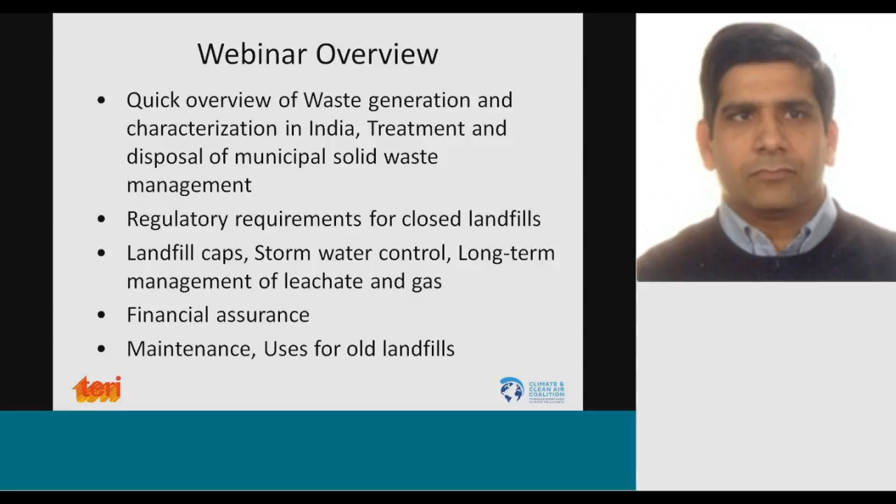So, just a quick overview in terms of the waste generation and characterization in India. If you look at the per capita waste generation per person per day, at an average throughout India, we'd say around 0.6 to 0.7 kg per person per day. This data is slightly older, published in 2015, but the data came out a few years before that. And here, as you can see, for the most part we are looking at around 0.5 being the average.

The CPHEEO manual, if you have looked at that manual, requires you to take around 0.6 kg per person per day for some design calculations. So even if you go by the CPHEEO manual, 0.6 is an average value for India, especially for urban India. But right now, Delhi is in the news for its air pollution problem. We may touch on that later today.

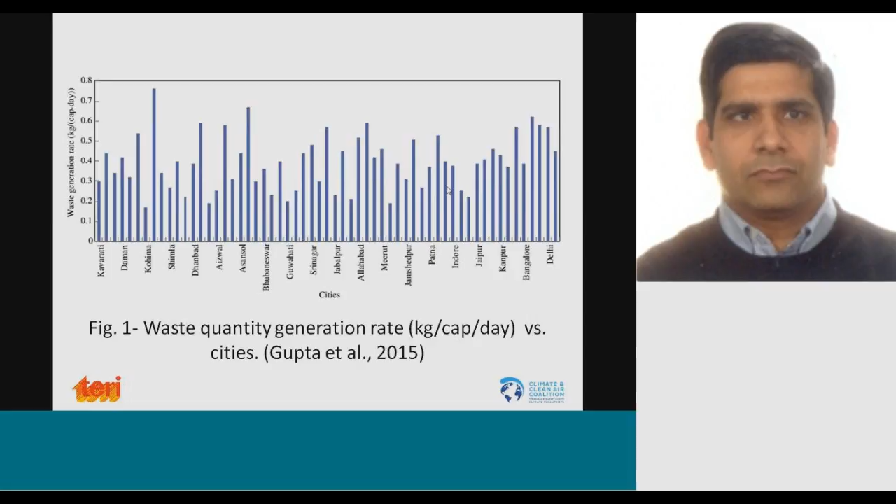But if you think about just Delhi city, if you are in a wealthy area of the city, you may find waste generation to be much higher. So if you're in South Extension, Defence Colony, Greater Kailash, or Vasant Vihar, you may find the per person rate to be higher compared to other areas of Delhi which are not that well off, where you see mostly lower middle class or middle class families. So there will be variability, but in general we can take around 0.6 to 0.7 kg per person per day. That's the typical total waste that is being produced.

And for different cities, this was a study presented in tables by the municipal manual. Depending on the population of the cities or towns we are looking at, the waste composition keeps changing to some extent. For the most part, the important stuff is the compostable material, which can be composted or anaerobically digested. That has a variability of around 30% to 56%.

As you go into the bigger cities, with a population of more than 5 million, you see that the compostable matter actually goes down, because more and more packaging material starts showing up, all those plastics which are not really compostable. And as we go to smaller towns and semi-urban areas, we start seeing more compostable material. And of course there are some variabilities in between.

And the inert material, for the most part, is finding its place in the dump site today in India, and in the landfill in many parts of the world. That's also substantial: nearly 40 to 50% of the waste is inert material. So that's it in terms of composition.

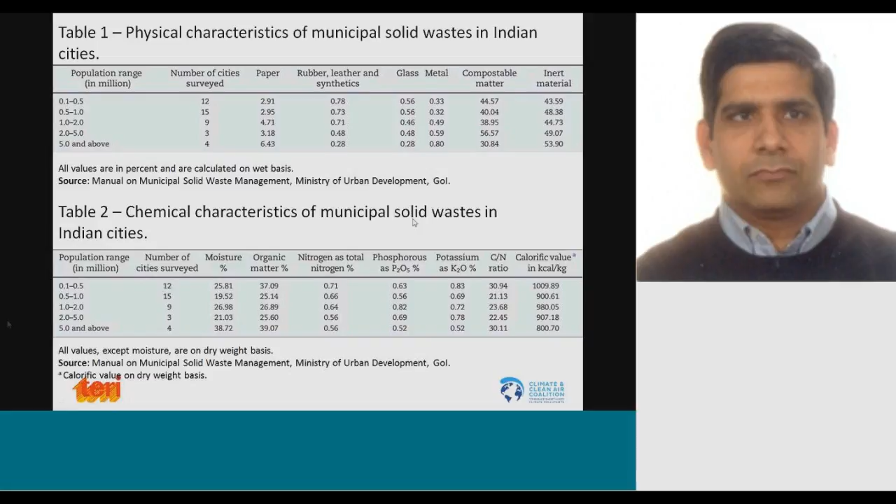We can achieve that if we do source segregation. Unfortunately, we don't do that. We have to do it as per the new MSW management rules, but we are not able to. So that's why we are where we are, in terms of just a snapshot.

And this is the same thing presented in a pictorial way, where you can see that fruits, vegetables and food waste are predominantly the compostable organic matter. When we talk about recyclables, the paper, plastic, glass, and metals, most of this material is taken away by the commodity owners. So the good quality ones don't really show up in the dump site. Only the ones which cannot be recycled show up there, and some soiled material mixed with other material may show up. There are also some toxic substances present.

This particular pie chart is not to scale. Don't think that 25% is toxic substances. This is just to show you the different types of things present in municipal solid waste. Then you may have some soiled waste like blood stained cotton, sanitary napkins, disposable syringes. So those things are also part of household hazardous waste.

If you have looked into the MSW Management Rules 2016, we should do a three-way collection: one for dry waste, one for wet waste, and a third for household hazardous waste. Some of the material from the toxic substances as well as from here should make its way to household hazardous. Some of these could also be classified as biomedical, but we don't have house-to-house biomedical waste collection, so we can put it in household hazardous waste.

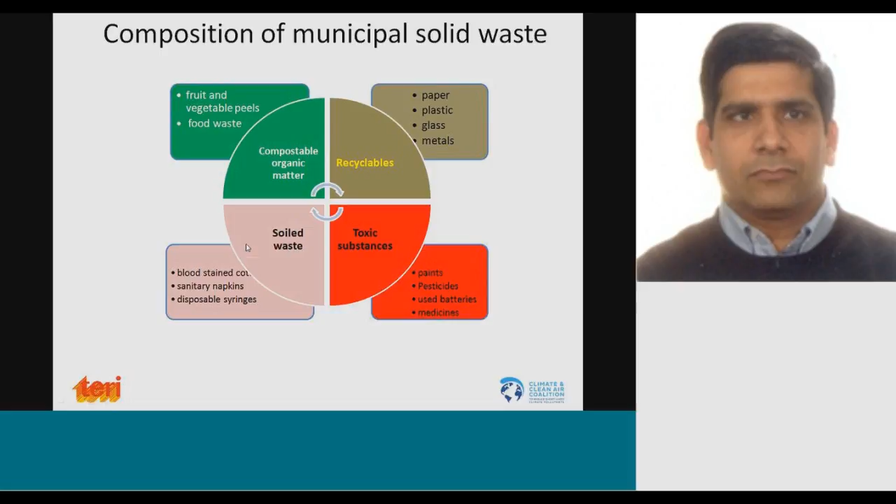Percentage-wise, the organic fraction is still pretty high; 40 to 60% is the organic fraction of municipal solid waste. And paper, which again is organic, but is hard to degrade due to high lignin content, is around 3 to 6%. Inert material is 30 to 40%, plus some plastic and metals.

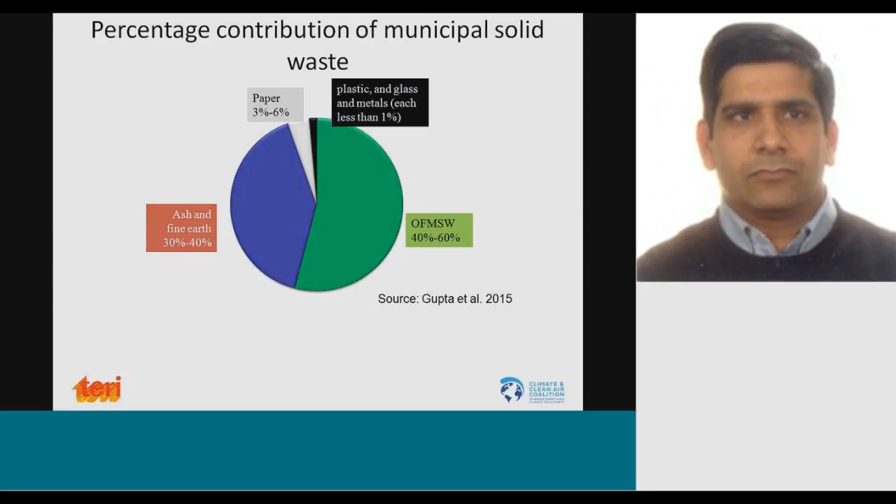It looks like this is the sample after the kabadiwallas. It's not the waste produced at the house, but the waste being disposed and coming out of the house, because recyclable plastic, paper and glass is taken away at the house level itself.

In terms of collection, treatment, and disposal, there are a variety of sources the waste comes from. It goes from household to primary collection, secondary collection, a transfer station, and then to dumping sites for the most part in the Indian context. Some composting is being done. In terms of recycling, we have households and buyers, then rag pickers from primary collection. There are recycling dealers and rag picking happening at the transfer station.

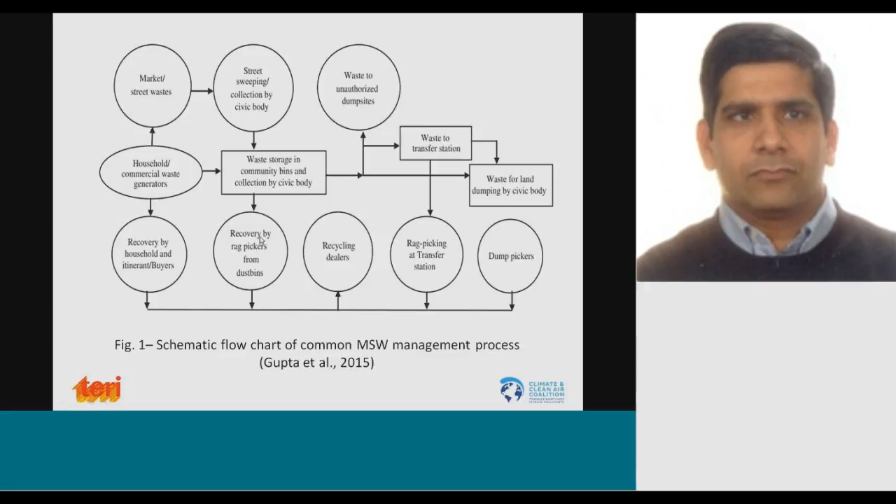Even at the dump sites, if you go to Bhalswa or Ghazipur landfills in Delhi or any big city landfill, you find several people trying to take out recyclable materials and make a living out of that. So people are doing dump site picking as well. They do help with recycling, but the environmental health and safety, as well as the processes they use, may not be so good.

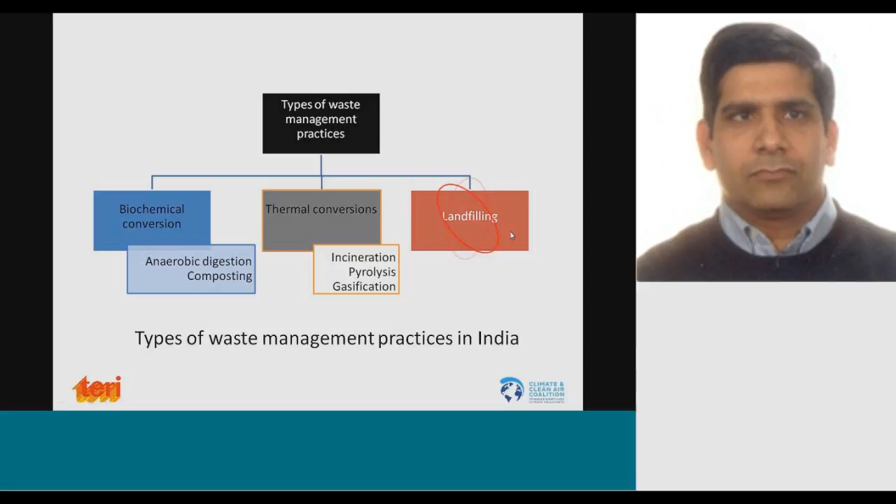Looking at management practice, there is some biochemical conversion, some anaerobic digestion happening, but very little. Composting is happening more in the country. We are trying to build some incineration plants, and a few are already running, but nearly 90% of the waste even today is going to landfill, which is mostly a dump site. So we'll start focusing.

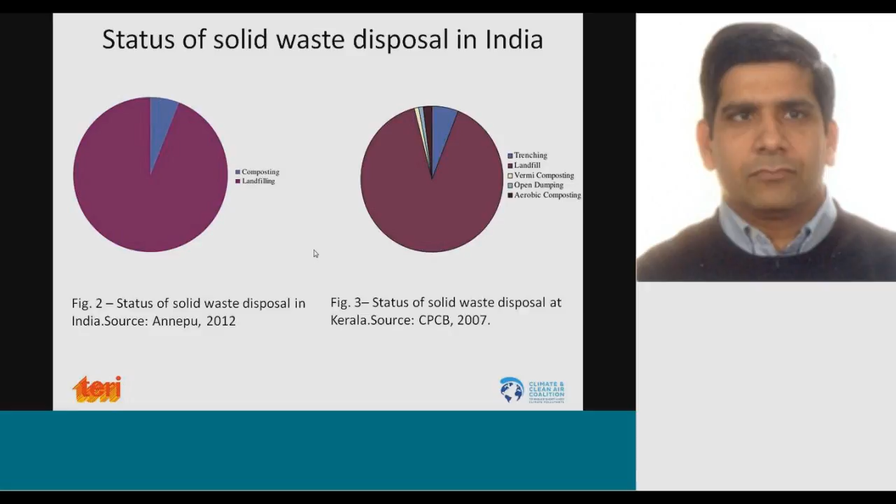So why is landfill still being used that much? It's the least cost option. It doesn't require skilled manpower, and in some places you can use it to convert marshy land into a useful area, but there is a danger of contaminating the groundwater and the subsurface. Natural resources return back to the soil and could be recycled; that's the argument people make, but I don't know how true that is.

Gas produced can be used as an energy source, for power generation, but there are a lot of problems with landfills as well, such as surface runoff during rainfall that causes pollution. Even when the landfill is active, we do have the problem of surface runoff.

And the same thing when the landfill is closed, we have to make sure that the surface runoff doesn't get inside the landfill, because that will actually be converting all that runoff to leachate. Then soil and groundwater may get polluted by the leachate as well.

Because the landfill is a huge area, even a very good landfill site has a gas collection efficiency of around 55 to 60%. If you find some landfill with around 60 to 65% gas collection efficiency, that's considered a very good gas collection system. So think about 65%, even at the best.

So another 35% of those are fugitive emissions. They just get into the atmosphere and cause greenhouse gases and climate change and all that. So that's why we need to have a good gas collection system as part of the landfill closure, and to monitor that gas collection system as well.

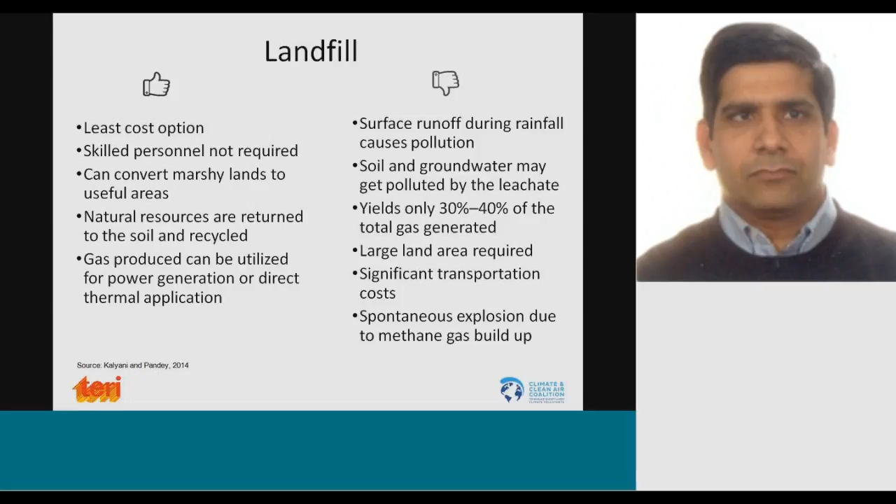Sometimes in these dump sites, we also put things on torch - we just put the fire on purpose. When I say we, I mean the people working there, the municipal workers who want to put more garbage on top. It's because the landfill is filling up and they need to make some space. In the middle of the night, somebody puts a torch there and it burns and then makes some space, which is not allowed, but it does happen.

So since the landfill is the focus of this webinar, let's look at landfill closure and what a landfill is. I assume some of you may have some idea, but I thought I'd give you a quick layout of what a landfill is all about.

So that is also there - we have leachate produced as a part of the waste degradation. That's a byproduct, so that is also used on there.

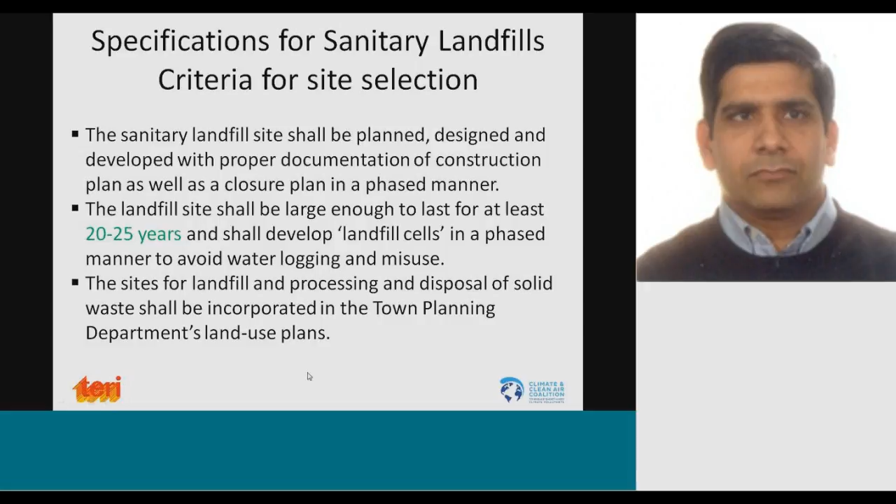As part of the design and the plan, you need to have a detailed design, proper documentation, and a closure plan, which we'll talk about. And it's part of the town planning.

So in site selection, there has to be some buffer zone with no development there. There has to be some temporary storage facilities. All these things are there in the solid waste management rules, and also in the municipal solid waste manual.

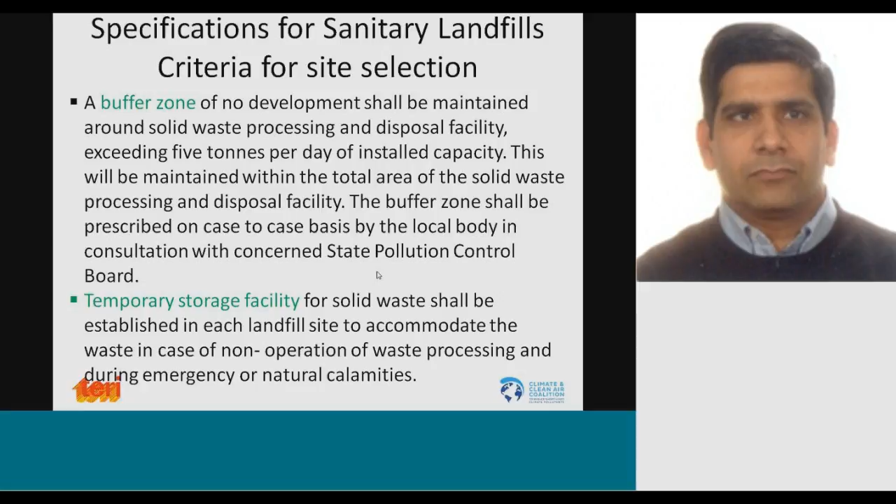You can download that if you go on the Swachh Bharat Mission urban website, or just search for the CPHEEO manual for municipal solid waste management in India. You'll find that manual PDF and can download it. It's several hundred pages, but it's a nice document, a good summary. There are some other things also available there.

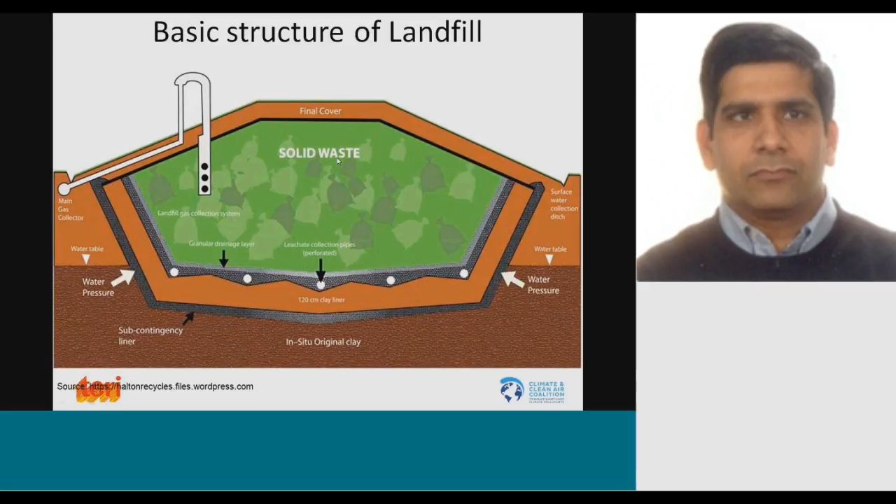The landfill should be 100 meters away from a river, 200 meters away from a pond, and all that. So this is what the landfill is all about. Let's focus on the final cover, which is the focus here.

Modern landfills are complex engineering systems. They are not like dump sites where you have a hole, you start putting garbage in, and then put some dirt on top. That's not how modern landfills are managed.

Modern landfills need to have a leachate collection system. Also, you see the groundwater at the bottom, and groundwater monitoring wells have to be there. Gas monitoring probes have to be there. A rainwater retention pond has to be there, so whatever rainwater flows through the slope can go into that area. So here again, groundwater monitoring.

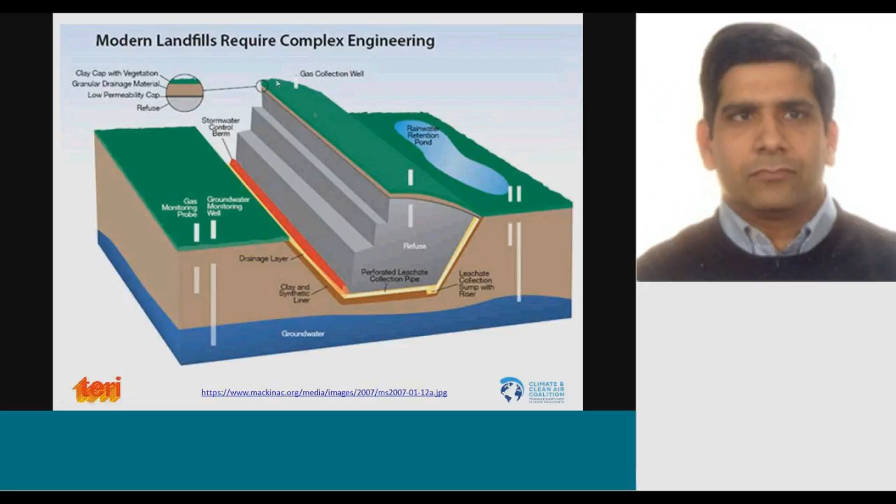There has to be a leachate collection system, there has to be a gas collection system, which you see over there, and the stormwater control berm is there. And then you have a very good cover design for this landfill.

In terms of landfill closure, when the landfill stops accepting waste, it needs to be closed. And when we say it needs to be closed, there is a certain regulation for that, and the regulation requires us to put an engineered cap on it. The goal of the engineered cap is to keep the rainwater out and the gas in.

Right now our focus is on why this landfill became important as part of the waste management system. Since, I'd say, the late 70s, early 80s, environmental professionals in the Western world were wrestling with how to manage this garbage so as to minimize the environmental and human health impact.

Since the technology was not as advanced as it is today, there weren't many things that could be recycled. For example, food waste to energy was not even envisioned during that time. So people thought that if we come up with this landfill, which will have a liner at the bottom and a cap on top, it will produce leachate.

So I will collect the leachate. I don't want to have the leachate build up, because that will create a problem in terms of the hydraulic stability of the landfill. There will be pressure, pressure build-up that will lead to a landslide.

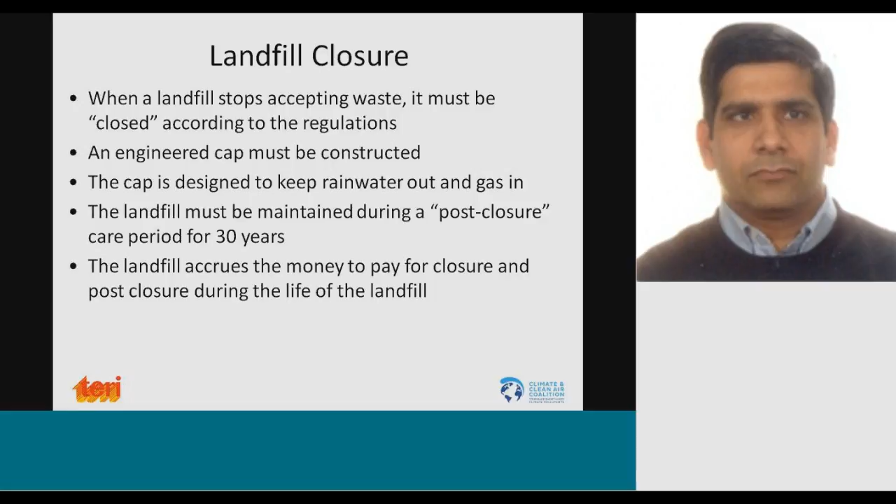So as per Solid Waste Management Rule 2016, there is a requirement for closures outlined. You need to have a final cover design, a closure plan, and a post-closure plan. And we'll talk a little bit about that.

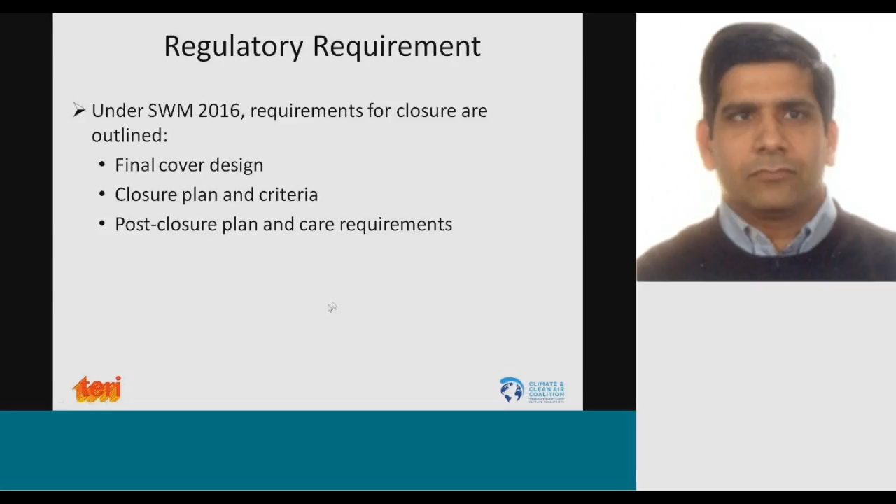It says that once the landfill reaches full capacity and you're not accepting additional waste, it should be closed, and you can reduce the waste by biomining.

If you don't see any further gas being produced, no more settlement - you have to measure settlement every 6 months or every year, and then look at the leachate quality and gas quality. If you don't see any of those, you get convinced that the waste has already degraded. So you can go for biomining, processing of the waste, and find the place for placement of the residue in the new landfill, or you can do the capping.

Capping is basically putting an enhanced geomembrane, and if needed, you can collect and flare the gas as an additional measure. You can put some extraction wells for pumping and other stuff. There could be other suitable methods as well.

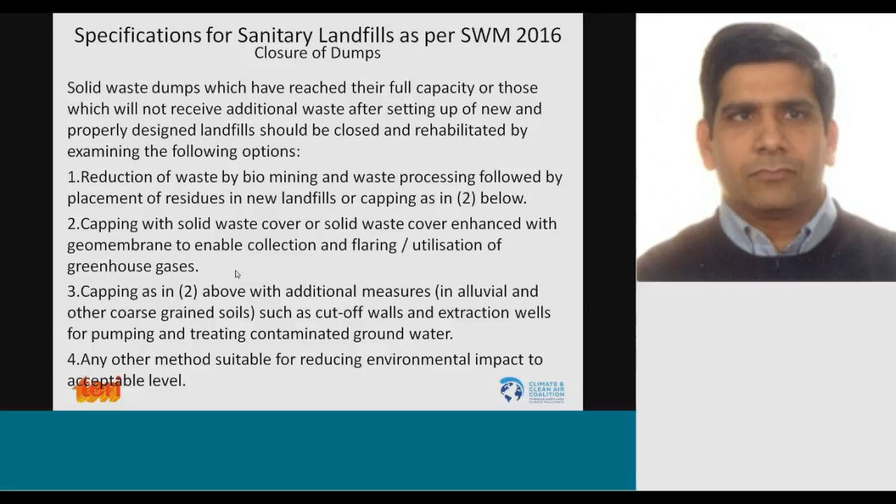In summary, for landfill closure, the goal is to minimize maintenance. We want to make the closure in such a way that maintenance is easy, control erosion so the waste or cover soil doesn't get eroded, and control and manage leachate, landfill gas, and settlement. We don't want one area of the landfill to settle unevenly.

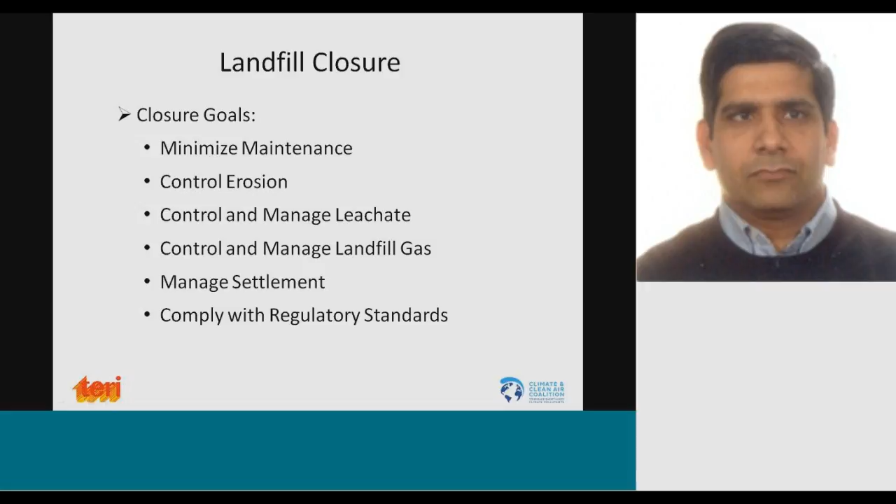That's what we do during landfill operation as well. We try to spread different types of garbage in different parts of the landfill so we don't get huge settlement in one area and not much in another, because that leads to liner stability problems. And then we have to monitor the regulatory standard.

So this is a typical landfill cap, this is how it looks. You have solid waste at the bottom, then the gas collection pipe, with a gas venting layer in between. Then you put a low permeability soil because you don't want the gas to escape through it; you want the gas to pass through these pipes.

Then you put a barrier layer, just to keep things safe from activities on top of the landfill, because with vegetative layers and other activities on top, you have lots of vehicles coming over it. So the barrier layer protects all the systems below. Then the gas collector can go to a gas recovery system and so on.

So you have a barrier soil layer around 60 centimeters, a drainage layer of 15 centimeters, and on top of that a vegetative layer. You put some trees on top of the landfill, which keeps the soil intact and also helps keep erosion low.

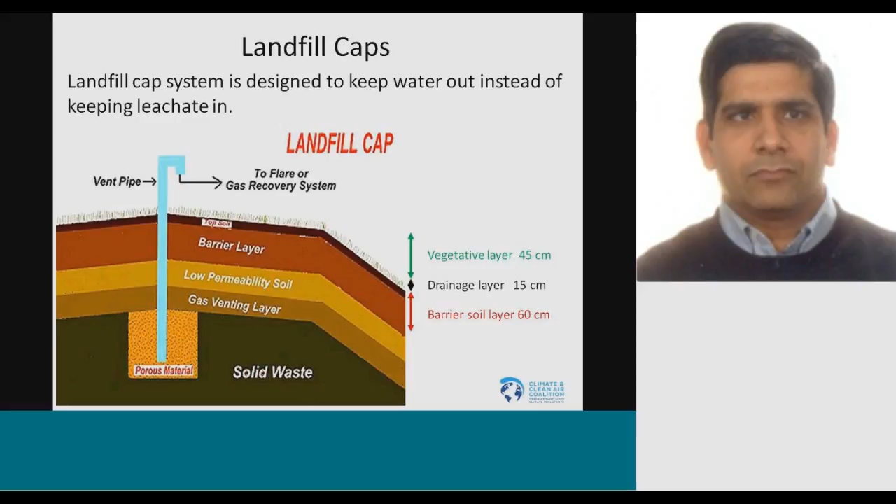That's how a typical landfill looks. From a distance, it just looks like anything else - you may even confuse it with a golf course because of the slopes. If it's done properly, you should not smell much on top of the landfill. If you're smelling gas, that means there's some problem with the gas recovery system.

Another picture of the same thing: you have the waste and gas venting, low permeable soil, then a geomembrane and the drainage layer, then a biotic barrier layer where you put wood chips and other stuff, and a filter, so even if some gas does escape it gets treated before it reaches the top layer. On top you have the vegetation and soil top layer, with vegetation planted on it.

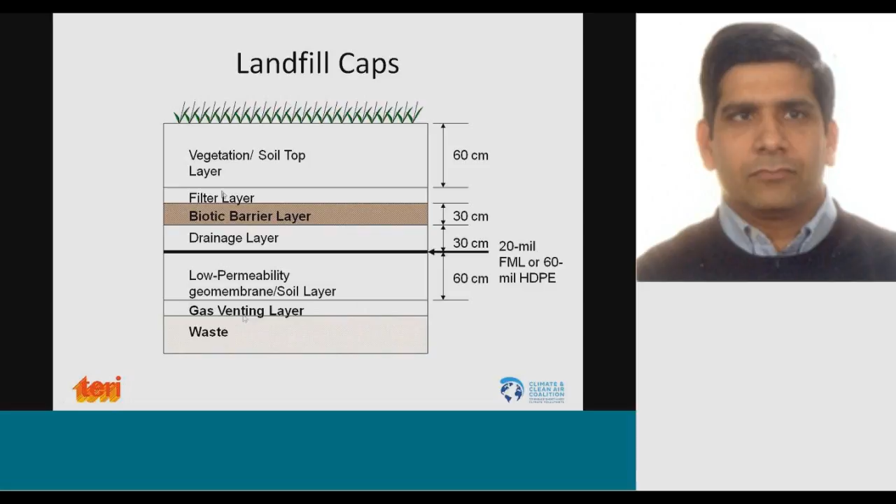So this is how the landfill caps look like. When I say cap, it's on top of the landfill and also on the side slopes. So this will be on the top as well as on the side slopes - that's how the caps look.

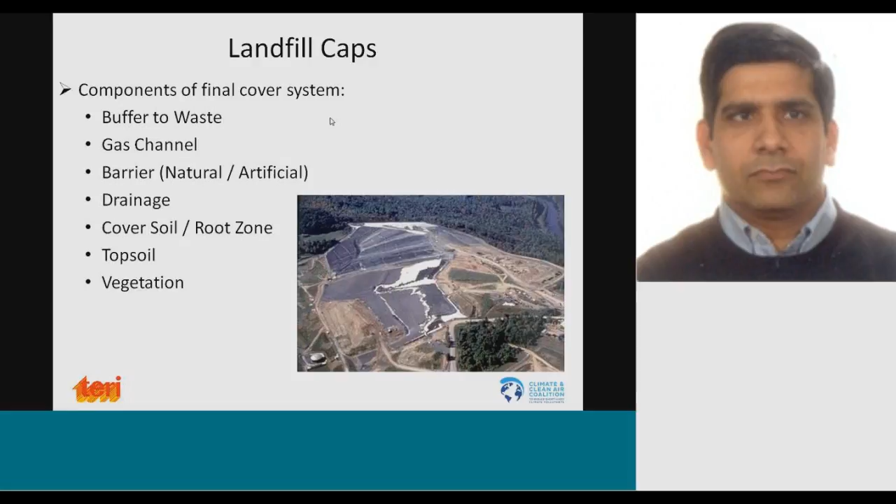In the final cover system, we put a buffer over the waste, as you saw, with several layers on top. We make sure the gas is collected properly, and there is a barrier - natural and artificial - along with drainage, cover soil, topsoil, and vegetation, all part of that system.

Once you have this cap system, there are other supporting systems. We have to make sure that after a rain event, stormwater does not create huge ponding on top of the landfill, because that would be a problem. So there has to be proper stormwater control with proper slope. Stormwater occurring on the landfill property or from adjacent areas should be prevented from getting into the waste, because it shouldn't, since we have the top liner with the HDPE geomembrane, so it should not get in.

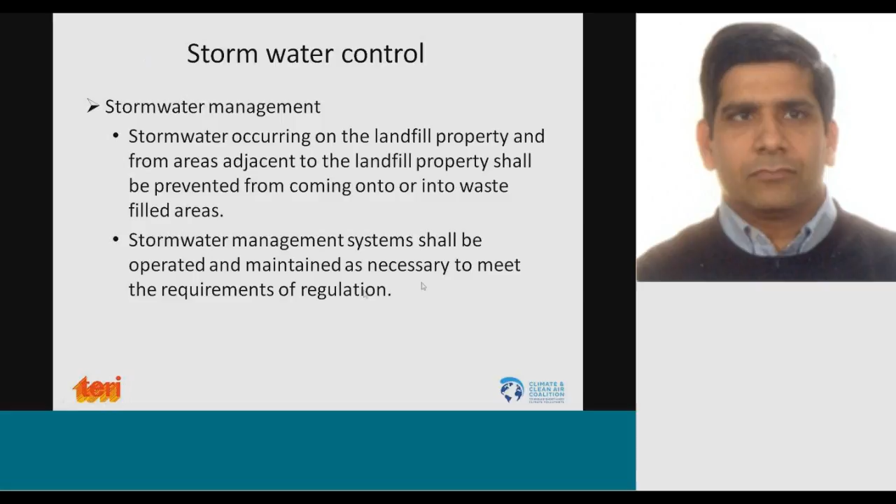Just in case you did not have this: you have the top liner and the side liner, and they need to meet at the anchor trench. Sometimes this meeting point does not happen nicely because the two are constructed at different periods of time. So there may be areas where stormwater can get into the landfill, and we have to prevent that. We should not let them get into the landfill, because that creates problems for landfill stability and for the leachate collection system, since a lot of leachate will be produced. We've seen this happening in some landfills. So the stormwater system shall be operated to meet this requirement.

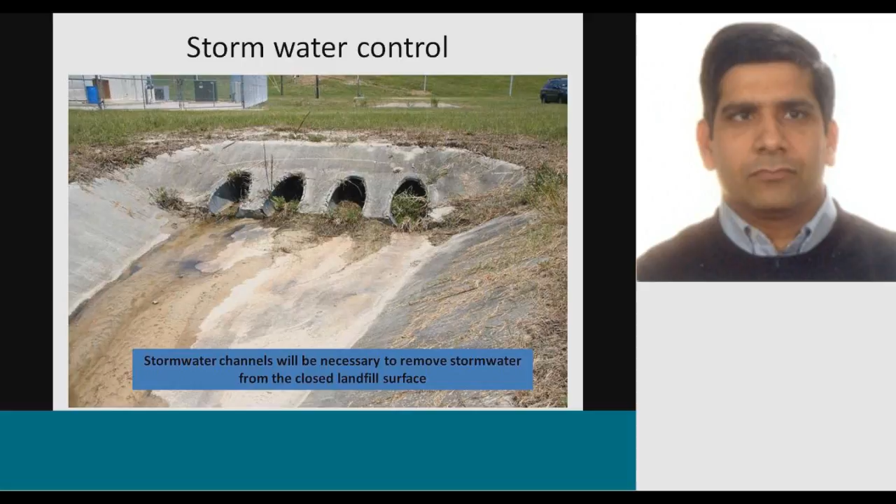For example, here is the stormwater control. We have stormwater channels, and we have to provide a nice slope and a nice drain. That's what it's all about. In a simple way, you have to have a nice slope, so any water coming on top of the landfill or on the side slopes should be taken away from the landfill as quickly as possible and put into these stormwater channels, so it doesn't pond on top of the landfill. The system is designed to route the stormwater away from the cover system, so it flows nicely away with a nice slope.

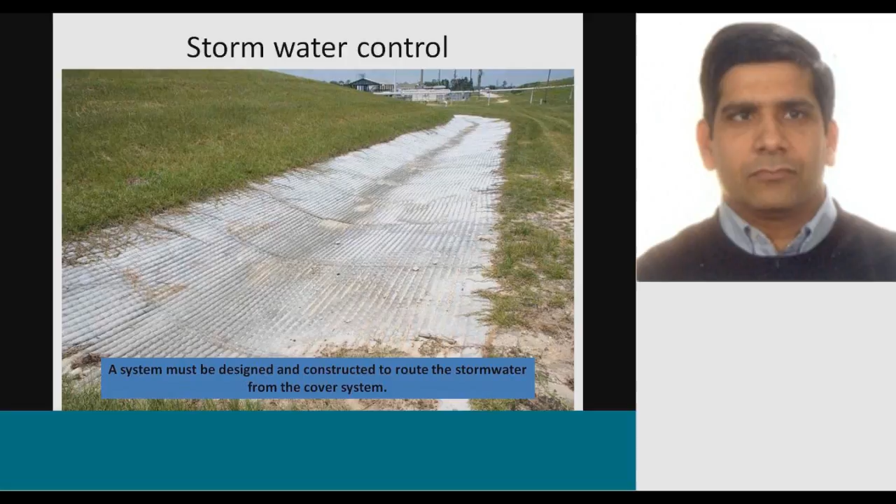This needs to be maintained. We cannot let all the grass grow up, or let a lot of dirt come in and mess up the slope. That maintenance has to be done over the period of post-closure care. Again, that's why money is important - it's a long-term management with routine maintenance for as long as 30 years, sometimes even longer, especially for municipal solid waste which still has organic matter. If you have just inert material, some landfills may be allowed to close before 20 or 30 years. But it depends on the leachate quality and gas quality - only then can you make the final decision.

So you have to maintain the final cover. If you collect leachate, you have to treat it as well - you cannot just dump it anywhere. Leachate needs to be treated. Groundwater needs to be monitored, especially at the landfill site. On both the upstream and downstream sides, you need to install groundwater monitoring wells to make sure the liner is not leaking and things are not getting into the groundwater. Those things have to be looked into.

Then there's gas migration - is the gas making its way into the groundwater? That's also problematic. If the gas goes into the subsurface, we have methane and CO2, which means an additional carbon load. This additional carbon load has the potential to alter the biogeochemistry of the subsurface. When it alters the biogeochemistry, that leads to pollution not only from the landfill itself, but also because of, say, arsenic present in the subsurface soil - and as we know, iron is a very good adsorption site for arsenic.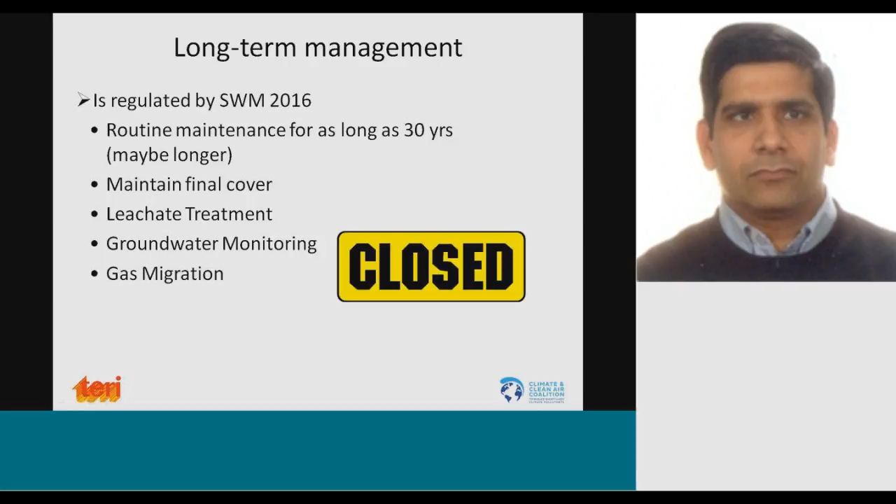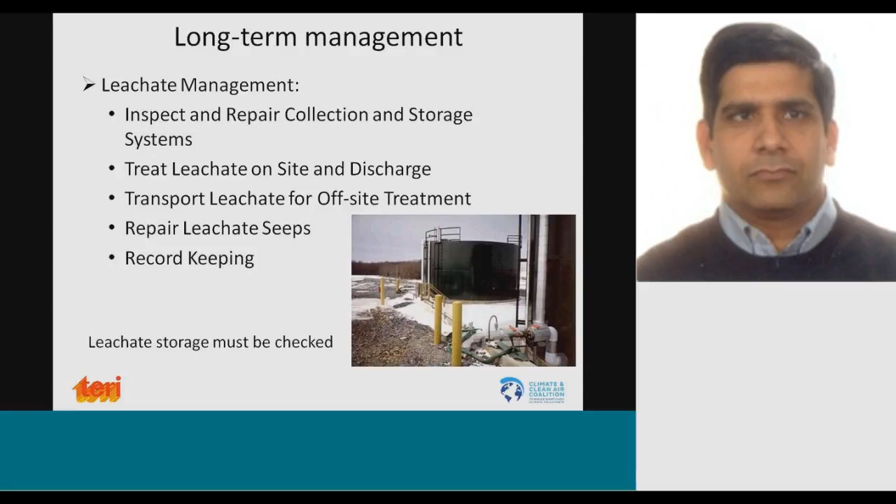The leachate has to be collected. The leachate collection system needs to be maintained properly. There is always a chance of the leachate collection system getting clogged, especially because of sulfur-based compounds. So that needs to be looked at very carefully. Leachate needs to be transported. It has to be treated. So these days we have robots which can go into the leachate collection system pipes and help us do the cleanup. If you go on YouTube, you may find some of those robot videos.

Then gas has to be collected and maintained on site. Inspect the collection system. Condensate removed. Since the landfill is slightly warmer than the ambient, when the gas comes out, it cools down, so we have some moisture that needs to be removed. Then if it's being flared, the flare has to be maintained, the recovery system, record keeping has to be done.

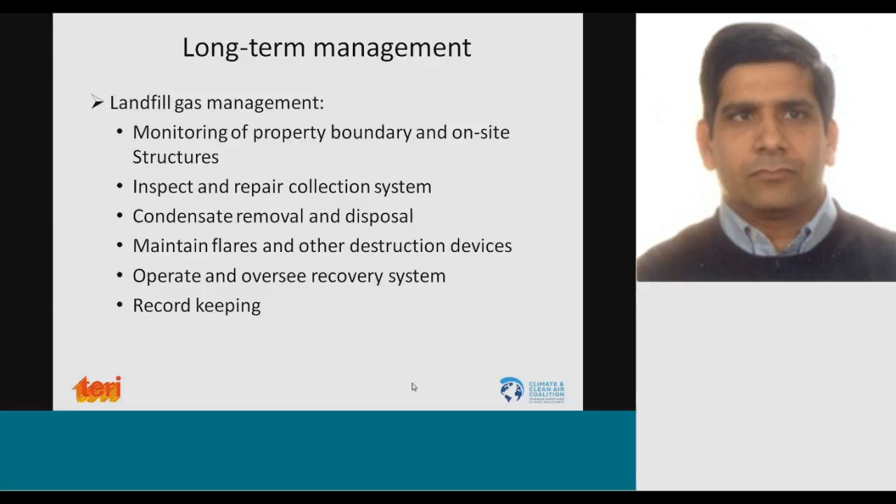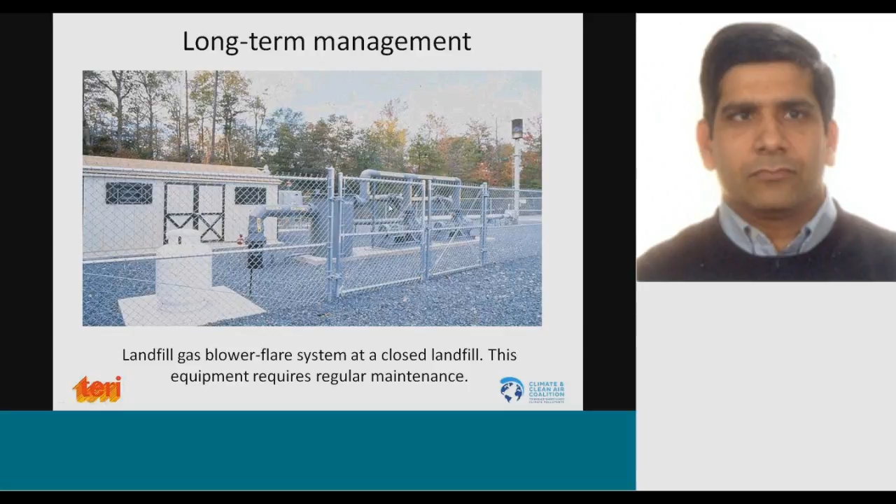The landfill gas blower flare system requires regular maintenance, especially if you have sulfur-based and other gases. That is nasty for these equipments, so you have to have good upkeep. That's your flare station right there, and this is the blower; all the vacuum and other things are controlled from here. And of course it has to be in a locked environment so that it doesn't get into some bad people's hands. So all that requires money.

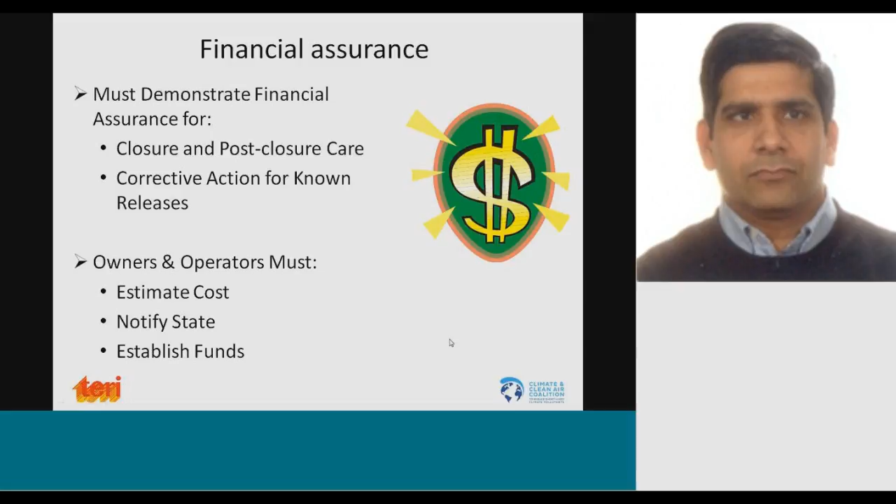So we need to estimate the cost to find out the money that would be required. We have to establish the fund for that. It could be in the form of a trust fund, letter of credit, bond, insurance, financial tests, guarantees, or a combination of mechanisms. So somehow we need to have money to do this for 30 some years. You do the cost estimate. You also do adjustment because there will always be inflation, because you're looking at a 25, 30 year time period.

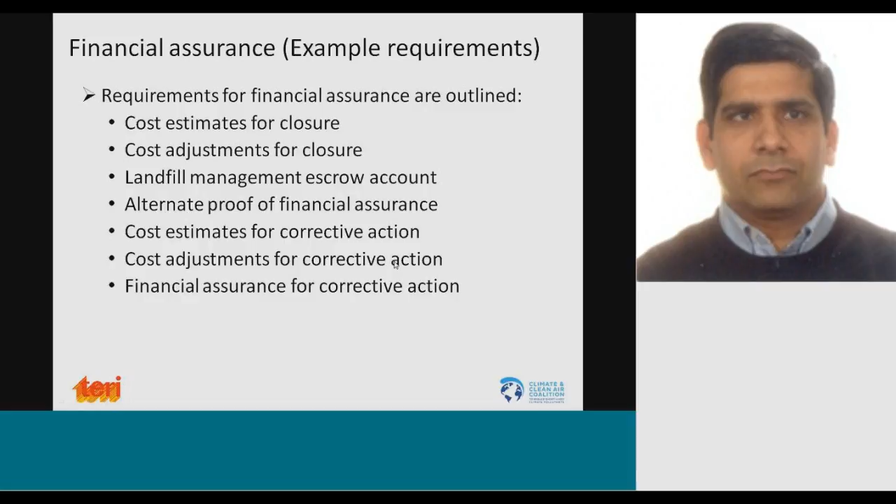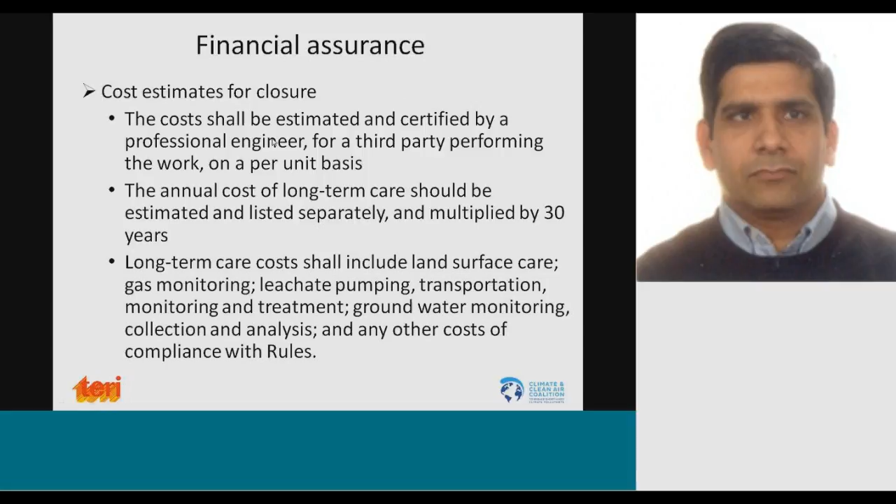Landfill management: you need to have proof of financial assurance, cost estimate, and adjustment of that. Then you need to come up with different costs for leachate pumping, transportation, the groundwater monitoring system, and any other cost of compliance with rules. There may be some changes in rules later on, which you may still have to apply, so you keep some buffer there. The cost needs to be estimated and certified by professional engineers for a third party.

And then for maintenance, you need to take care of the surface, keep the record, and do the monitoring. In many places this is done as a part of PPP. The municipality will hire a consulting firm, the consulting firm will do all this, and they give the report to the municipality, who in turn will submit it to SPCB and then to CPCB.

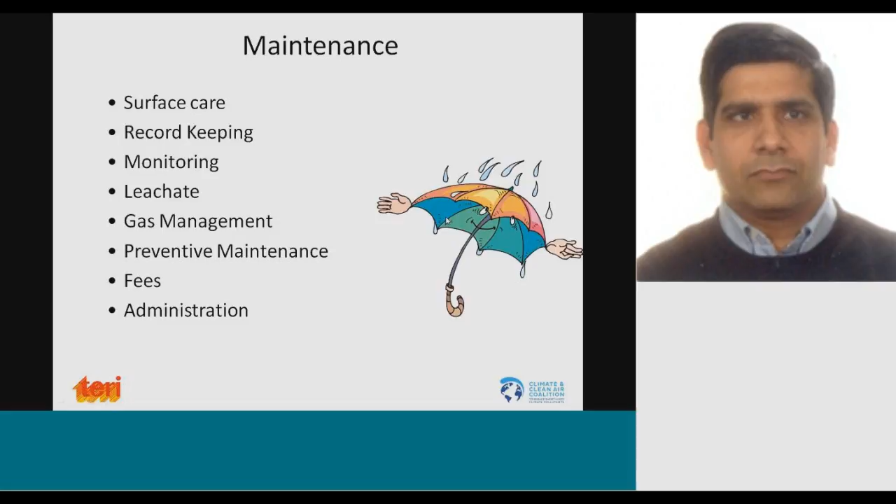But they will do it, and initially it needs to be done every 3 months, then 6 months, then once a year, if you have no problem. If you have a problem, then the frequency changes. So you have to do things for all this stuff. In terms of post-closure, you have to monitor the leachate, monitor groundwater, as we talked about, and monitor the landfill gas.

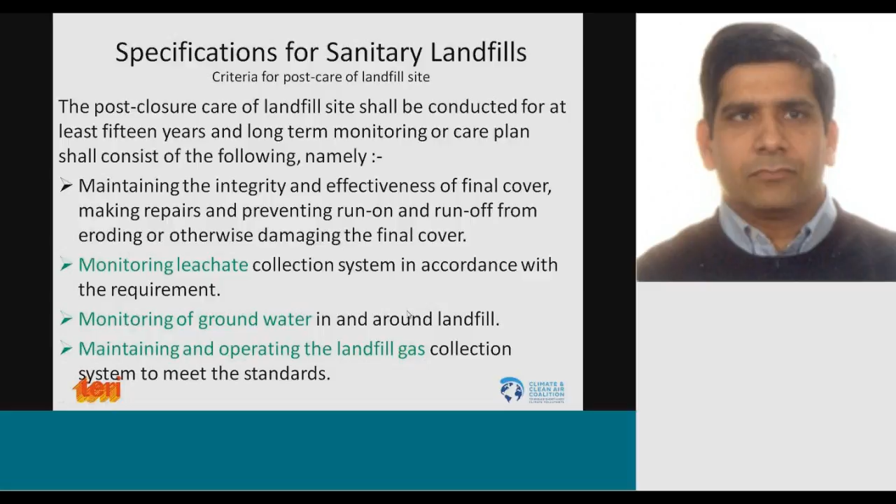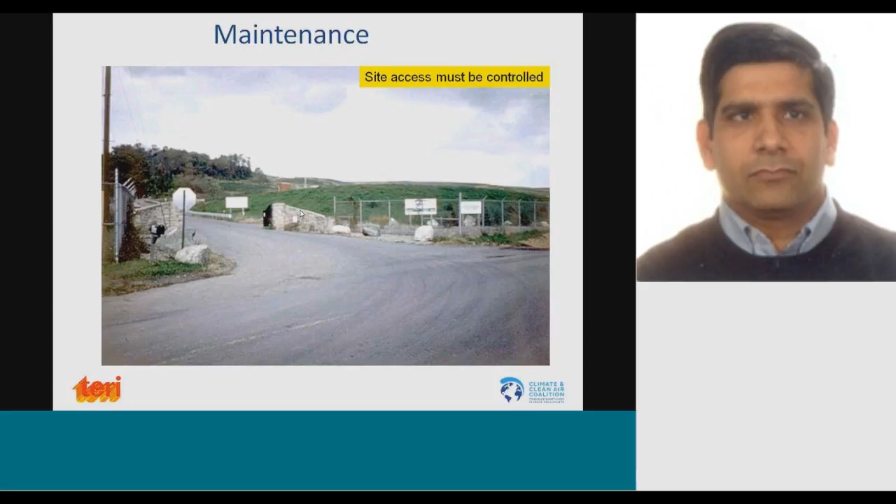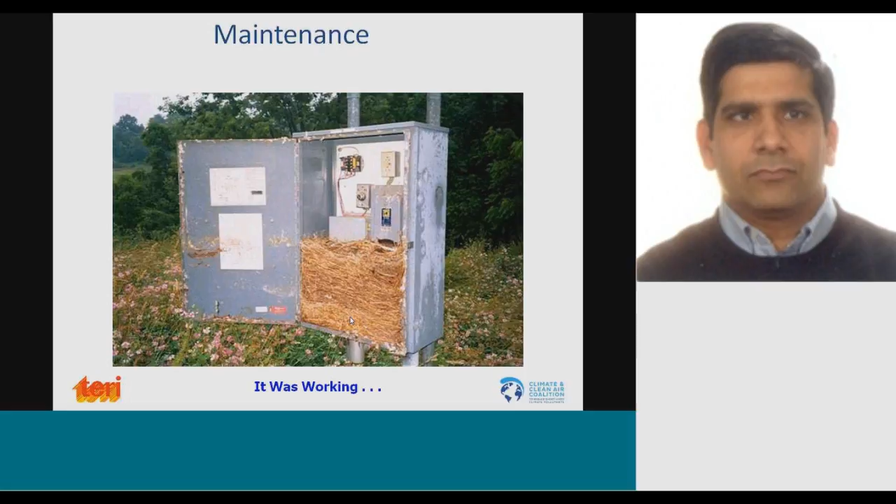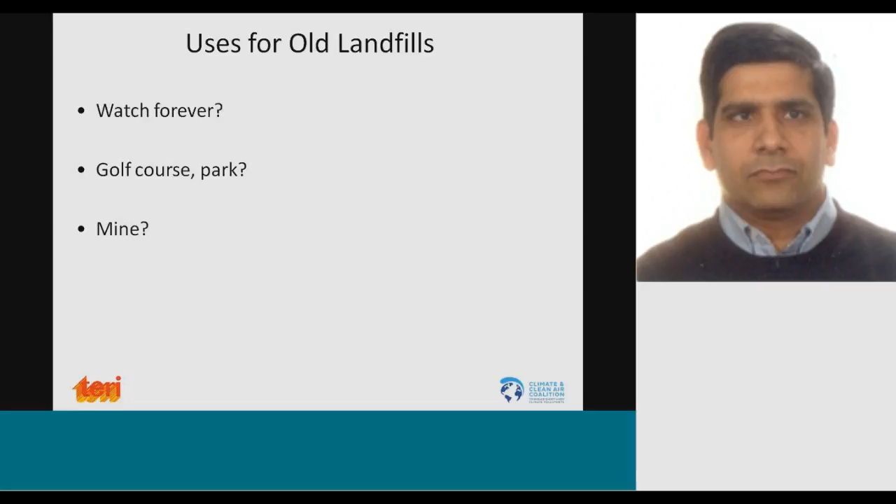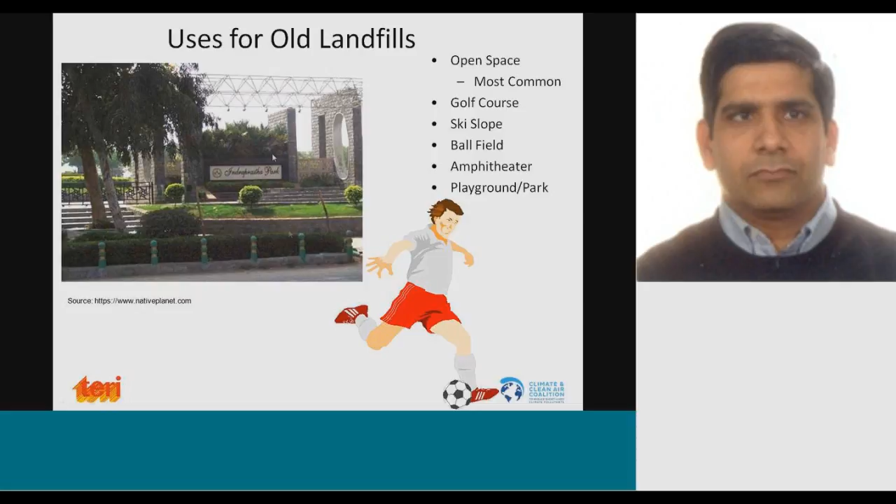So after you watch it for several years, what should you do? Should you watch forever? It can be converted to golf courses and parks. You can mine. Both bullets 2 and 3 are being done. Some landfills have been converted to golf courses, some to parks, and even landfill mining is happening. Some places are even doing a ski slope, a ball field, an amphitheater, a playground. For example, Indraprastha Park was an old dump site.

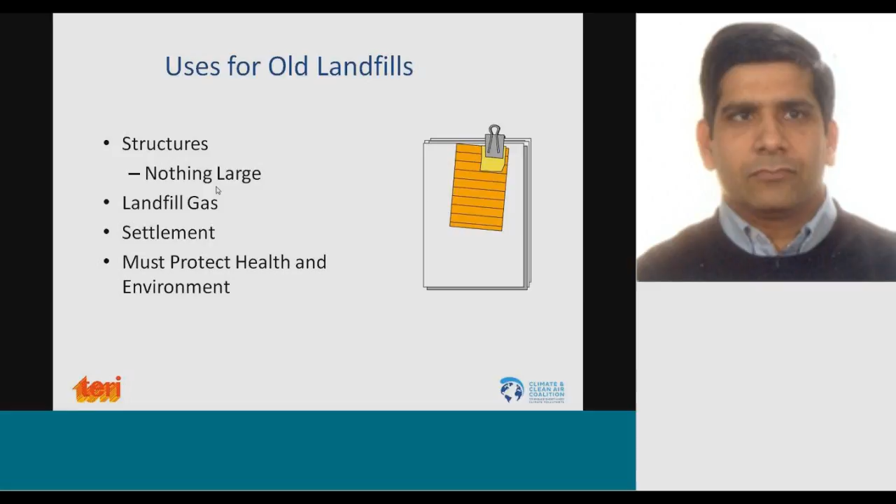Once the landfill is closed and the waste has degraded for a period of time, you don't see much landfill gas being produced, you don't see much settlement, and you have to look at health and environment. You can build some structures on top. You don't want to build too big, because it's still a landfill. If you put too much pressure on top, it may settle, because it's not soil, it's garbage. So you need to look at the geotechnical properties of the landfill, like decomposed garbage.

That leads to landfill mining, which is a process where we can excavate once the garbage is already stabilized, with no further degradation. It's mostly inert material. We can excavate it and potentially use it as a construction material, or as a cover soil for the landfill.

Most of the landfill mining that has happened has been on old dump sites. Some of the materials were recovered because some recyclables that can be recycled today could not have been recycled earlier. And we can recover ferrous and non-ferrous metals much better today than 20 or 30 years ago. The technology has improved, so we are trying to use that.

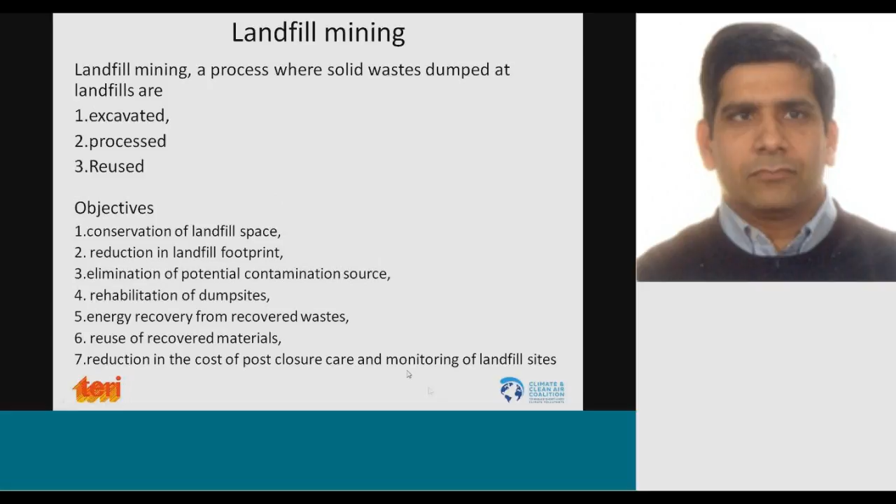It helps in conservation of landfill space, reduction in the landfill footprint, and you eliminate a potential contamination source, because even a landfill liner will have a tendency to break after a certain number of decades. Since finding a new landfill site is very difficult, what we try to do is take the waste out, use the same landfill space, put a new liner system in, then put the new garbage in and use the garbage that came out of the old landfill as daily cover material if needed. So you can rehabilitate. Energy recovery can be done from the recovered waste as well if it has a good calorific value.

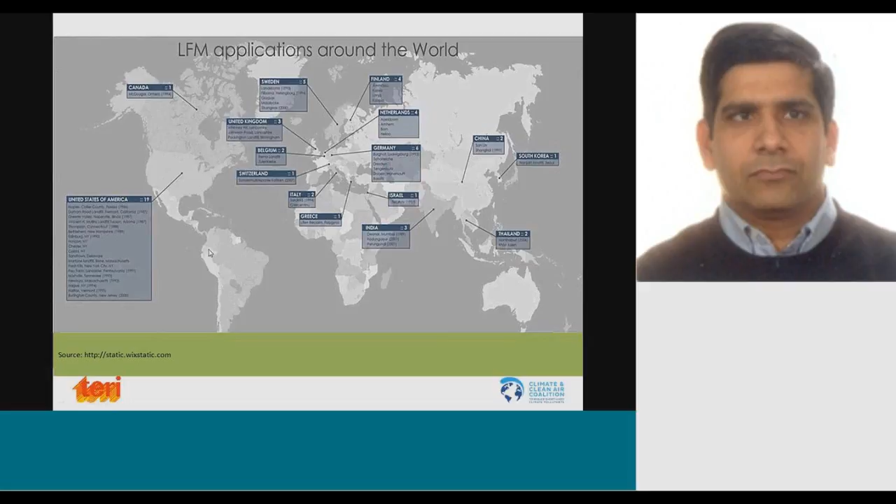A lot of projects are happening around the world, as you can see, even in India. The US kind of leads the pack with 19 projects in the recent decade. You have to look at the composition of the waste. What is the market value? Again, the economics have to work.

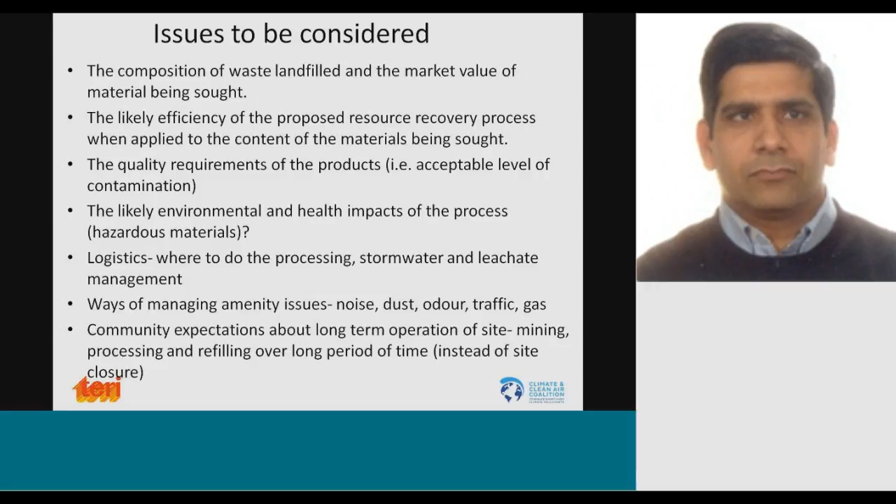So what is the efficiency of the proposed resource recovery process, quality, likely environmental impact, logistics, where to do the processing, what will happen during the rain event. Say after a rain event, things may become kind of leachate, how you do that, how you manage the noise, dust, odor, traffic, what is the community's expectation. So all those things need to be there.

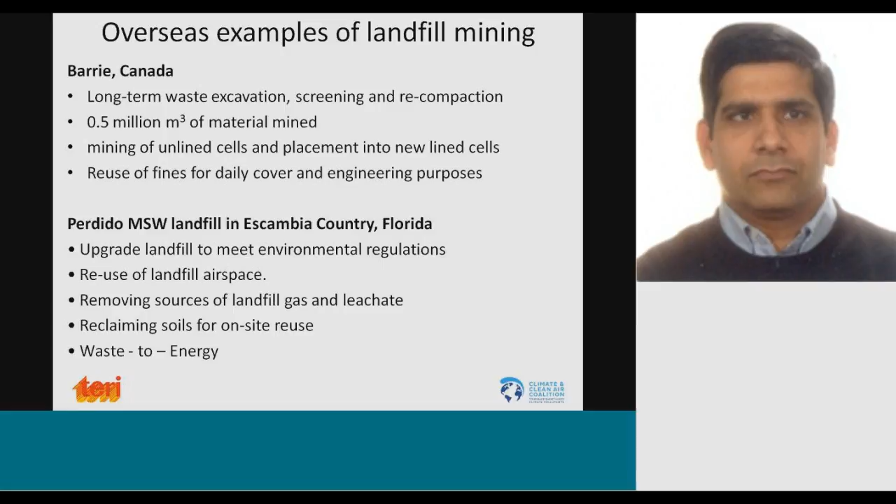There are some examples, like in Barrie, Canada, they do waste excavation, screening, and recompaction. They mine the landfill, they mine an unlined cell and place a new lined cell. That's what I was saying. Perdido landfill, again, does the same thing. They put a lined cell there. They reuse the landfill airspace. They upgraded the landfill with newer regulation. And they also did waste to energy because after doing some segregation of the garbage, after removing the soil kind of material, they could use other material as a good calorific value source for waste to energy.

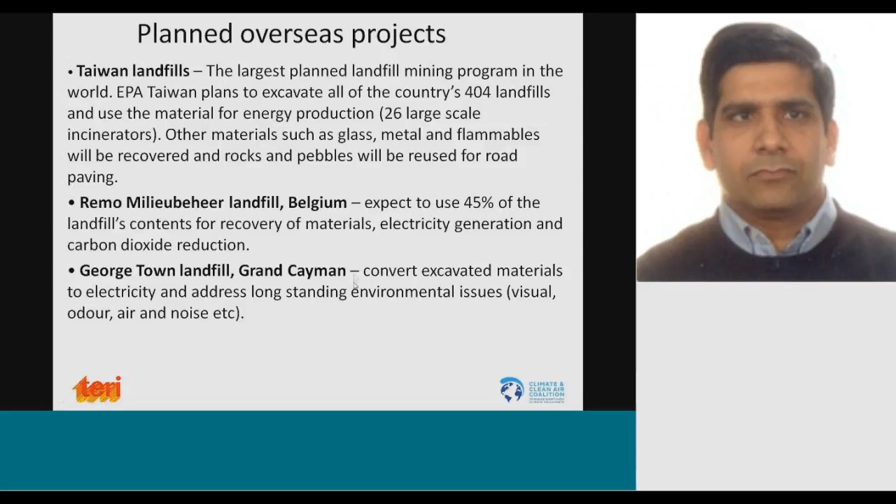And Taiwan is the largest planned landfill mining program. The EPA of Taiwan is planning to mine 404 landfills and use it for energy production. So that's what is going on. In Belgium, they're trying to do that too. George Town in Grand Cayman are planning to do something as well. So there are a lot of planned overseas projects. In India also, people are talking about landfill mining, and we see some of the tenders are coming up for landfill mining as well.

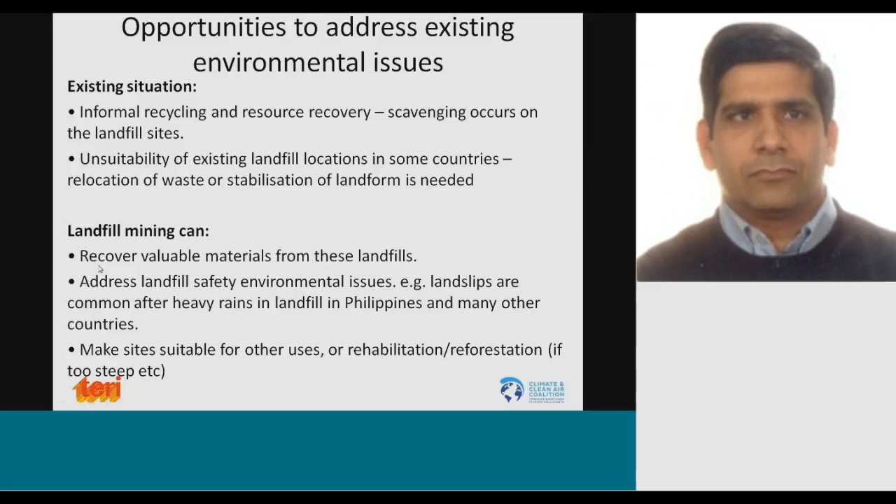So in terms of existing environmental issues, we have the informal recycling, resource recovery, and the scavenging at the landfill site. It's unsuitable for existing locations in some countries, because landfill mining can recover valuable materials from the landfill and address landfill safety. We have to make sure. So these are some of the stuff. Say we are doing regular mining, we can get some of the recoverables from the landfill, and then we can bring it back to our economic cycle. So that helps. That can be used.

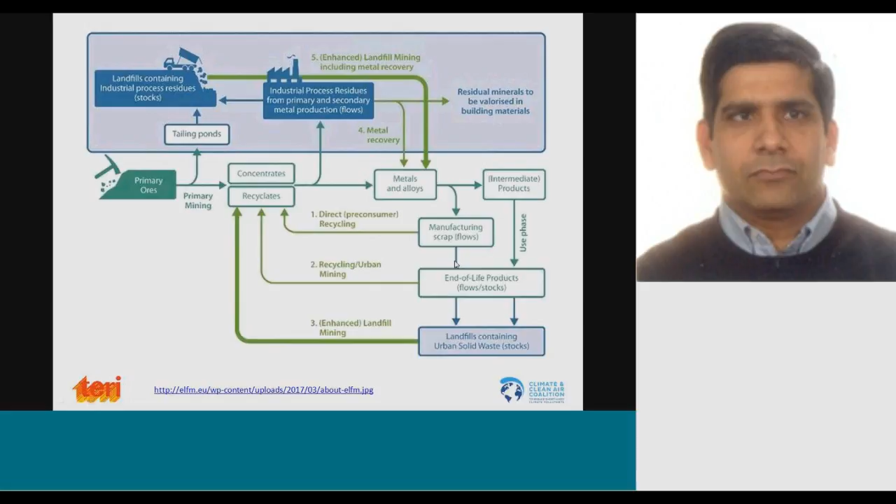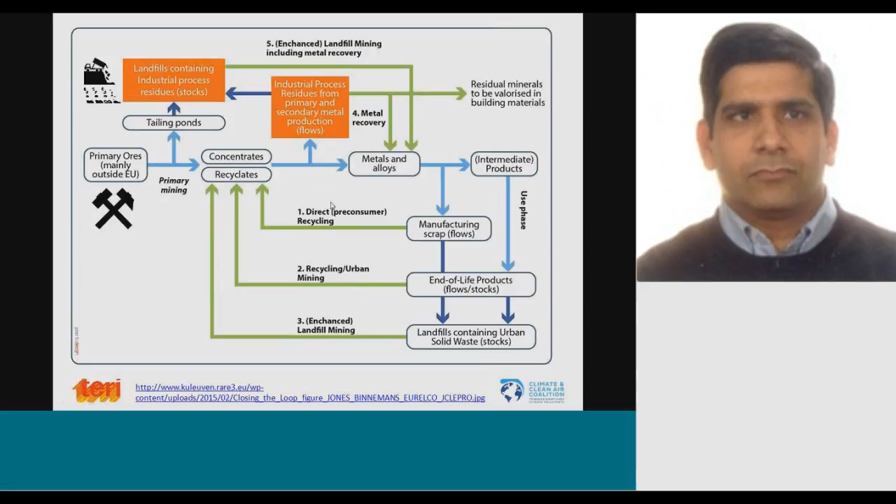Landfills containing urban solid waste stocks. So another example, landfills containing industrial process residuals, we can use that. We have a primary ore. This could be a secondary ore that can come back to the economy and be used as a source of secondary material. And you have existing landfill sites, around 150,000 to 500,000 landfills in the European Union. There are different options they were looking at. They do nothing, or they could do classic remediation with re-landfilling, if they have to make a sanitary landfill.

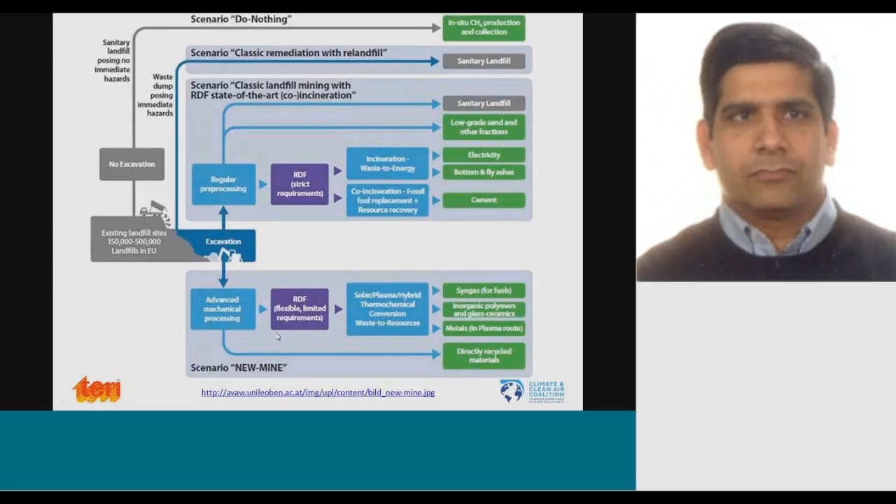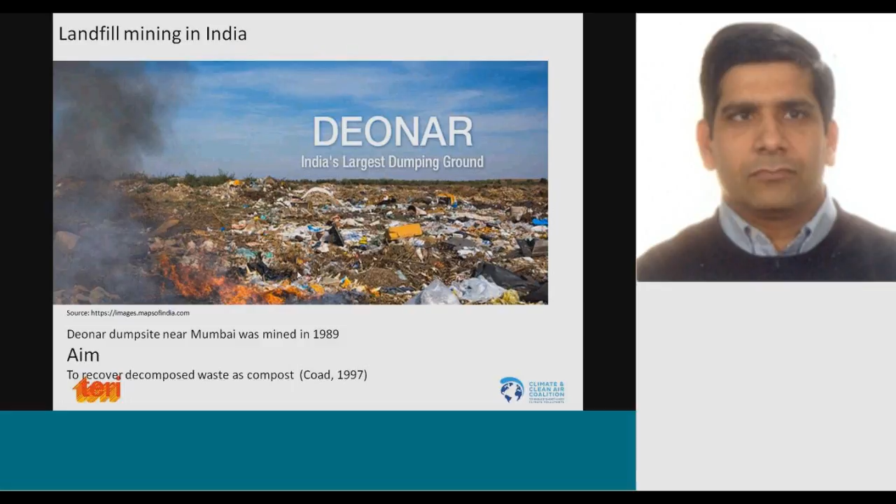The European Union, as you know, has been going very big on waste to energy. So they are looking at whether they can take this material, produce RDF, and go for waste to energy. And then if needed, part of it could be used for sanitary landfill as well. And then looking at the use of raw bottom ash, fly ash, cement, and all that. They can do some advanced mechanical processing as well, scenarios like new mine. Deonar landfill, which was dumped, then the mining was done in 1989. That was, I think, one of the first landfill mining projects in India, at least.

So in terms of summary, it can be used to recreate landfill airspace. Rigorous cost-benefit analysis is needed. We have to do some on-site trials to prove that landfill mining is economically viable. We have to look at the logistics and environmental management. There is a huge potential, especially in developing countries. For example, we are working with Guwahati right now. Guwahati has a landfill site, and although NGT wants them to get another landfill site, it's very difficult to find a new landfill site. The existing landfill is simply a dump site.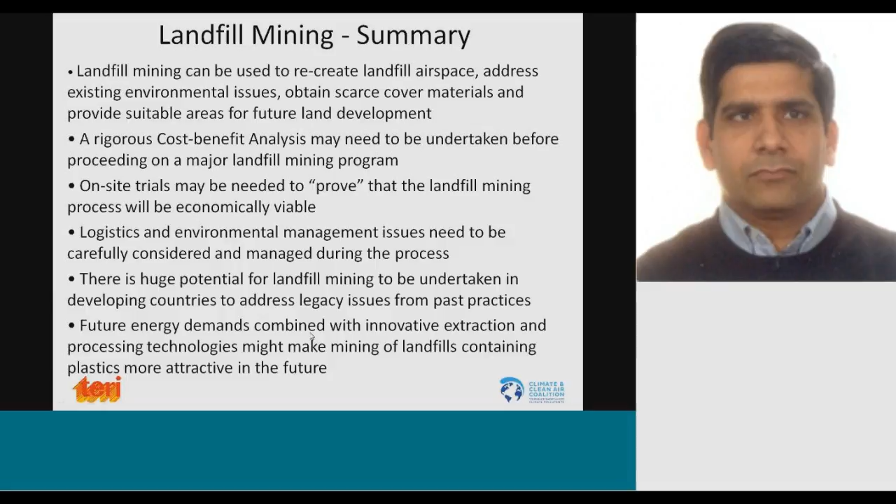So if we can convert that dump site into a good engineered landfill facility, that will at least reduce the concern that the NGT and other people like us have in terms of it creating problems for the environment. And if the calorific value is good there, future energy demand can also come from there, especially plastics, if plastic can be mined and used as waste to energy. So that pretty much brings it to the close of this webinar.